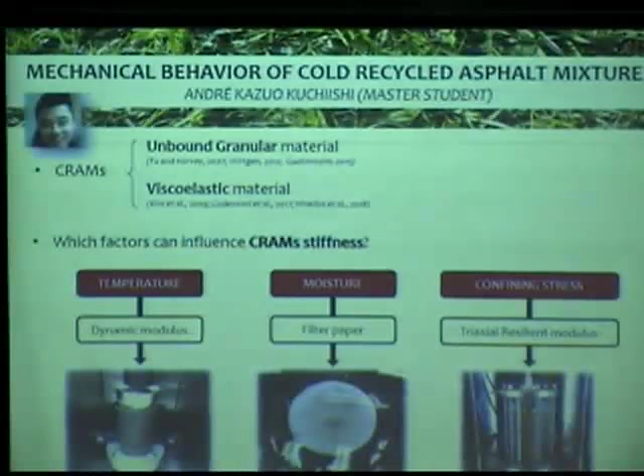some performance model for this type of material, cold recycling with foamed asphalt. The second study, from Kazuo, our master student, he should be done by the end of this year. In his study, he will try to understand better the stiffness behavior of cold recycled mixtures, not only the ones with low binder, but also the ones that have a little more hydrated lime or cement on it, since we have a couple of test sections using more cement.

In his study, he will try to get the influence of temperature on this material, the influence of moisture, more specifically, what exactly is going on during the curing process, when water is getting out of the material in the lab and in the field, what exactly happens. And also the confining stress.

The third study is conducted by Vanderlei. He's right behind here, he'll also be working on cold recycling. I've put here the 4 test sections already constructed and under evaluation. What we see here is these 2, one with emulsion, the other with foamed asphalt. But this one has 2% cement, a little more binder than what is established by South Africa. And it has 12 centimeters of HMA on top.

The other 2 structures are on the same highway, but now I have just foamed asphalt, on one side RAP, and the other virgin aggregates. But on top, I have just 5 centimeters. So this type of section is more similar to what is being done in South Africa.

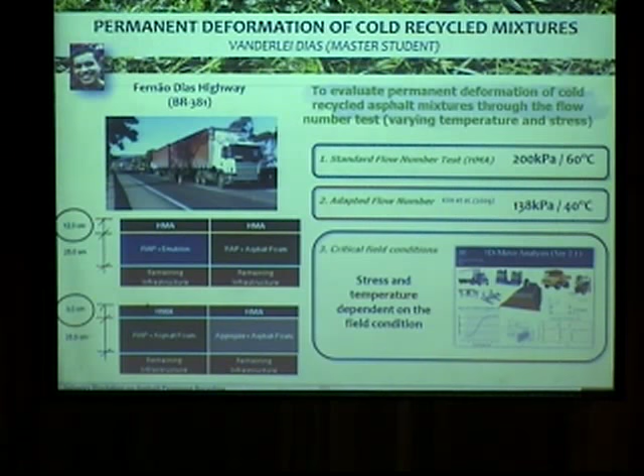So the idea is, if we assume that permanent deformation is the main distress on these structures, how we may evaluate it, and we selected the flow number test. There's a test for HMA, so that's the first standard here, using stress of 200 kPa and temperature of 60 degrees C. But we are also going to test different conditions, in terms of temperature and stress. The second scenario follows the recommendation of another publication with less stress and less temperature.

And the third condition is to simulate in a 3D software what is going on in these structures and try to get that on the test.

Going to hot and warm recycling, this slide is from a former student, he's not in the lab anymore. Manuela did her PhD and also postdoc at the Laboratorio of Pavement Technology under the supervision of Professor Liege Bernucci. Manuela's study was very broad because she worked on the binder, on the mix, and during her postdoc, she got also the field test sections with 8 different mixtures.

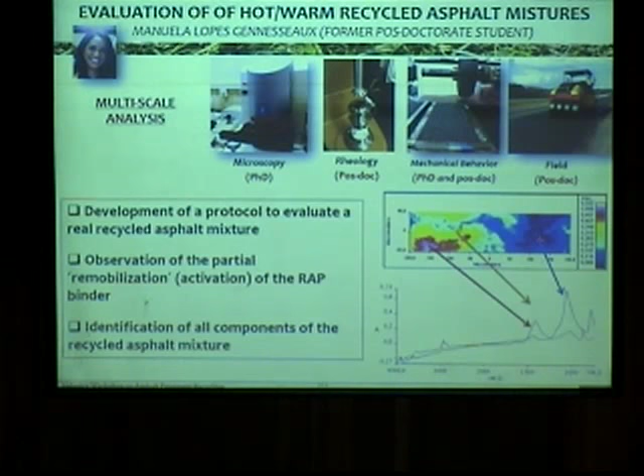Another study that just started this year has been done by Zila Mascarenhas, also a PhD student, on multi-recycling. It's not an actual issue in Brazil yet because we are still trying to keep going on the first recycling. But if we recycle today, in 10, 15 years, we might want to recycle this mixture again. May we really get back the performance of this recycled mixture 1, 2, 3 times, or how many times can we do that?

So this is part of Zila's study. She'll keep her eyes on the binder, but also on the mixtures. I don't think we'll be able to do anything in the field related to multi-recycling yet.

Another study has been done by Karina, a master's student. She has mostly lab results, trying to increase the amount of RAP in the mix, with and without recycling agent. Karina also works at a concessionaire here in São Paulo, so she's trying to put this mixture in the field. She's done a detailed literature review on what should change in our asphalt plants to really recycle these asphalt mixtures. In Brazil we're trying to stay cautious at this first moment, but it would be nice if we could have asphalt plants prepared for higher amounts of RAP.

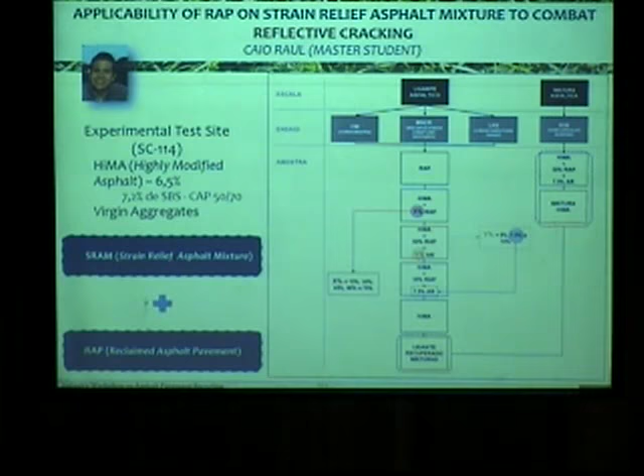This study is also being done in our lab by Márcia, a master's student. This one is not only related to recycling, but to aging. On the binder side, we try to understand this aging process in terms of physical, chemical, and rheological measurements, using different binder sources chemically speaking, but also different rejuvenators.

I guess this is the last one. This has been done by Mateus, also a master's student. I mentioned the degree of blending in a previous slide - Mateus is trying to quantify this blending. We're going to mix the binders anyway in the lab or in the plant, so how can we quantify if this binder is really homogeneous or not? In his study we are doing staged extractions, following a standard ASTM procedure, and using rheological and chemical parameters to get at this DOB, degree of blending.

Regarding hot and warm recycling, we definitely need better asphalt plants, otherwise we will always be limited in the amount of RAP we can put in our mix. We have to take more care with RAP handling, because if we decide to use it as part of the hot mix asphalt, we have to know what we are putting in there. We also need to improve mix design and understand the use of rejuvenators in the plant.

But maybe the most important final message: we are pretty sure we can do more, we can do better, if we keep working together. RILEM is a very nice opportunity for that. I keep saying to my friends and colleagues that after I entered RILEM, everything changed, because I know many more people now, I know what they are doing, we keep in contact, we discuss different points of view, and I think that's very productive. So I think that's it.

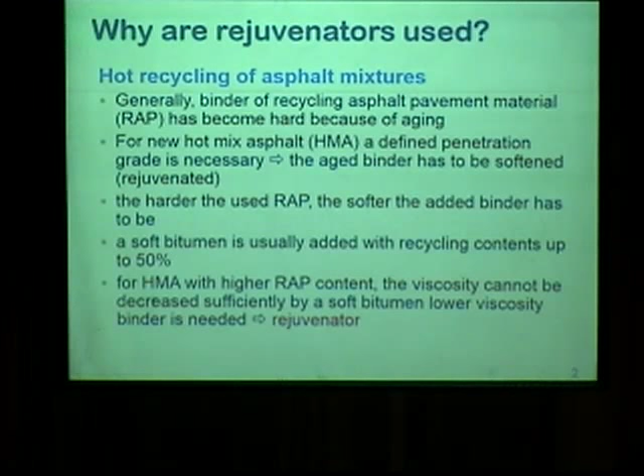Why are we using rejuvenators in hot recycling? This is especially for hot recycling. The recycled asphalt pavement, the old material, gets hard. So if you want to use it in a new hot mix, you have to make it softer to rejuvenate this material. There are several options. Normally you just add a softer binder, and if you mix it with the old material, you get the binder rheology you normally want in a hot mix. But that only works up to about 50% RAP content. If you go higher, you need an even softer binder, and eventually there is an end - you don't have binders soft enough. So you have to add a rejuvenator to decrease the viscosity of the mix.

So what are these rejuvenators? This is not an easy question because the chemistry is very different, as the sources used to make them are quite different. You can make rejuvenators from mineral oil like bitumen, or use plant products like vegetable oils, which may be too expensive, or other industrial byproducts. The sellers of these rejuvenators are very ingenious - they can sell a lot of things, and you have to be careful what to buy. Actually, it's not only the viscosity which is important. You cannot just decrease the viscosity of the binder; you have to look at other things.

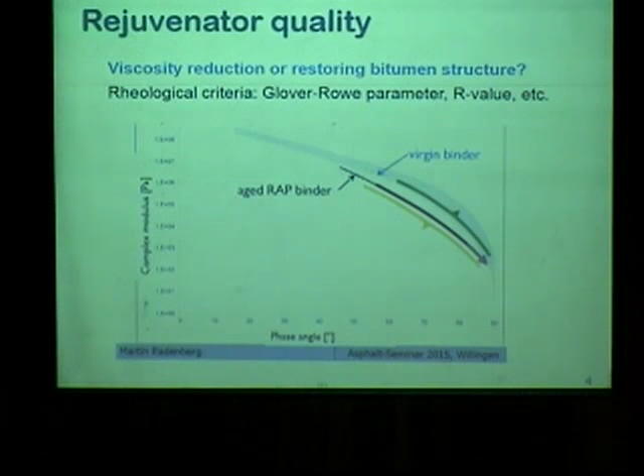But how can we find out what is a good rejuvenator versus a not-so-good one? There is an interesting study from Germany comparing quite a lot of different rejuvenators on the market. These are results from DSR measurements: the black line is the RAP, the old material, and the blue region is what you normally have for a virgin binder. What you want is that adding the rejuvenator brings the mixture back to that blue region. Some rejuvenators can do that, but a lot of them just move along the same line, which is more or less just reducing viscosity. Some even go in the opposite direction, which you don't want. So there are other criteria, and we are still struggling with what is the right method to assess the quality of rejuvenators.

We also have to look a little bit at the aging of the bitumen to understand why we can use these rejuvenators. Actually, you can divide a bitumen into different parts, normally called the SARA fractionation, which divides the bitumen into 4 different regions: saturates, aromatics, resins, and asphaltenes.

And if you look at the aging, for example in RTFOT short-term aging, you see that the saturates and the aromatics are decreasing in amount, and what is increasing are the resins and the asphaltenes.

So actually what you could think quite easily is that you only have to replace the saturates and the aromatics, and then you have again your new bitumen. But this is not so easy, because you need quite a lot of these saturates and aromatics, and normally you don't add such a large quantity of rejuvenator. It's about between 5 and 10%, depending on the amount of RAP. So that's not actually possible.

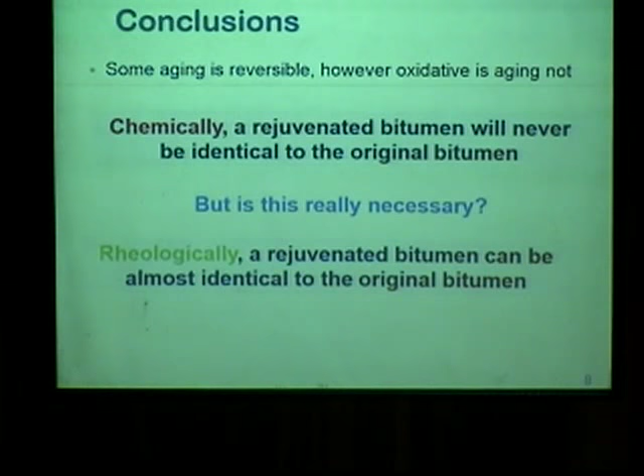But probably rheologically, rejuvenated bitumen can be almost identical, at least in the beginning. But one important point is the aging, and this is actually exactly what we are doing in our TG3. We are looking at the aging behavior of such mixtures between rejuvenators and bitumens.

We have not yet any results, so you have to wait a little bit. So I give over to Dr. Falchetto.

Okay, good morning. I will start from where Martin left off. I will show you some results of a study that was performed at TU Braunschweig in Germany. It's a very simple experimental study on the possibility of using rejuvenator in combination with reclaimed asphalt pavement.

And as I said, the experimental study is based on a simple and, let's say, new test that was proposed in Germany, which is the bitumen Typisierung Schnellverfahren, or in English, binder fast characterization test, and on a series of conventional tests on asphalt mixtures. Okay, what did I do wrong?

This test, the BTSV, was proposed basically a couple of years ago to replace the conventional binder characterization used in Germany based on penetration and ring and ball, so softening point. This is basically the first version of the test, the first cover page, which can be translated as: introduction for determining the deformation behavior of bitumen and bituminous binder with the dynamic shear rheometer, BTSV procedure, binder fast characterization test.

This test is based on the dynamic shear rheometer, and in this case is used to determine the amount of rejuvenator to target a specific rheological property of the blend of new binder, aged binder, and rejuvenator. It's performed with an increasing temperature at a rate of 1.2 Celsius per minute, 500 Pascal, and a single testing frequency. From this test, what we obtain is a temperature, T-BTSV, and a complex modulus and phase angle at a specific complex modulus value of 15 kilopascal.

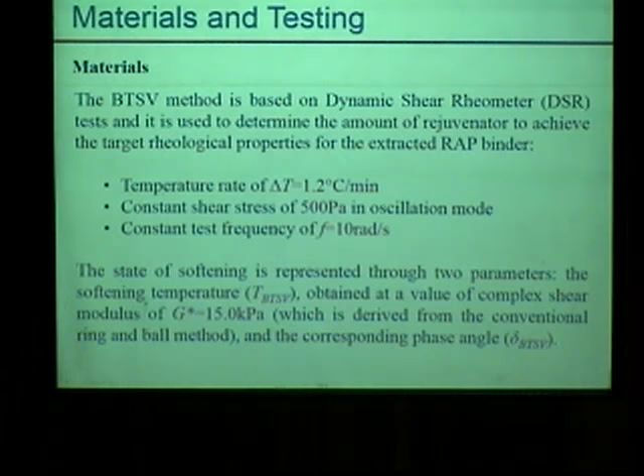At first we have a plane which gives us the temperature and the G star, from which we obtain the corresponding temperature based on the G star limit of 15 kilopascal, and the corresponding phase angle. Based on that we get what we call the BTSV plane, obtained by plotting the temperature of BTSV versus the phase angle.

What we found is that when we blend binders, we move along a line that is targeting the final binder box, which may be different depending on the binder that we are using. But when we use rejuvenator, we are moving along a horizontal line.

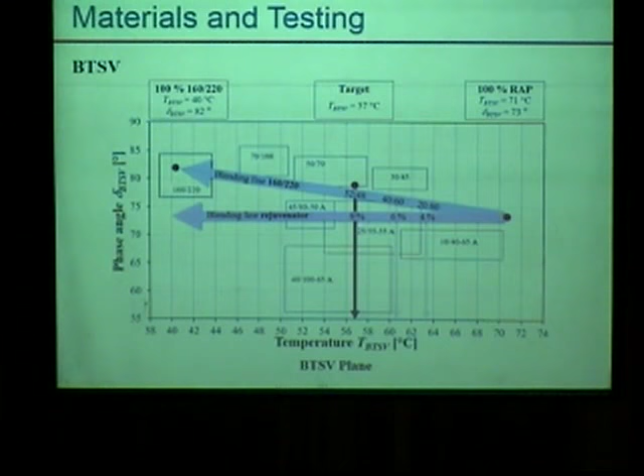What we did in this study was to select a specific RAP binder and a specific RAP source, and we blended it with 3 different rejuvenators, basically one soft binder and 2 types of rejuvenators at different percentages, 20 and 40%. We targeted a final blend value of 57 Celsius for the softening point, and for the bitumen type, the Schnell-Verfahren temperature, or BTSV.

After we determined the amount of rejuvenator, we ran simple conventional tests on the asphalt mixture to determine resistance to permanent deformation, finding that the method actually decreased the rate of permanent deformation, except for one specific rejuvenator.

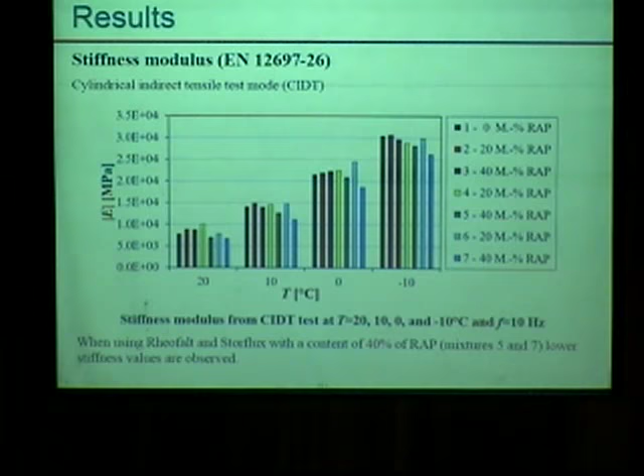In the case of the rejuvenator compared to soft binder, we had a decrease in the stiffness modulus, which can also be seen in the trend of the master curves, with a softening at lower temperature and a moderate stiffening at higher temperature. This is for 40% of RAP, while the previous one was 20%.

Then we looked at fatigue, and we determined that the contribution of the rejuvenator to the mixture prepared with 20% RAP was not so significant, although there was an improvement in fatigue life, while this was much more significant at 40% RAP.

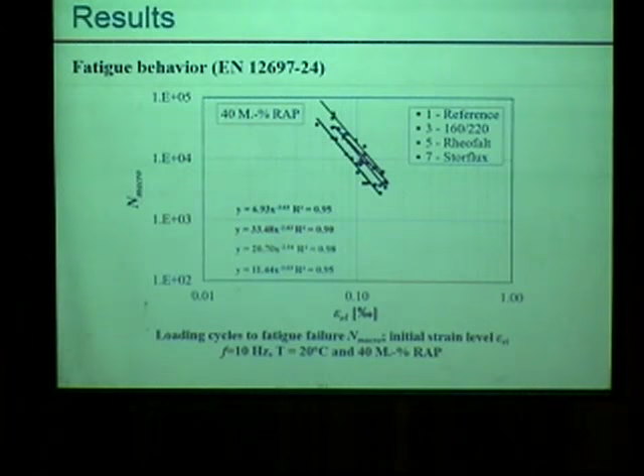And what I care about most is to show what happened at low temperatures, which is much more interesting and very questionable. We ran the TSRST test, the thermal stress restrained specimen test.

And what we found out is that there is not consistency in the result, because what happens is that we have an increase in the failure temperature of the mixture, although the failure stress, or strength, remains basically the same.

This poses some question on the method that we were proposing, the bitumen typisierung Schnellverfahren, or BTSV, on its ability to really provide the correct amount of rejuvenator needed to rejuvenate the binder and the RAP binder in the mixture.

Summarizing, what we have done was to try and evaluate the possibility of using this new BTSV characterization method to design mixtures containing reclaimed asphalt pavement and rejuvenators. For stiffness and fatigue, we have a reasonable result. At low temperature, as I said, the results are relatively similar in terms of strength, but in terms of failure temperature, we actually have poorer performance.

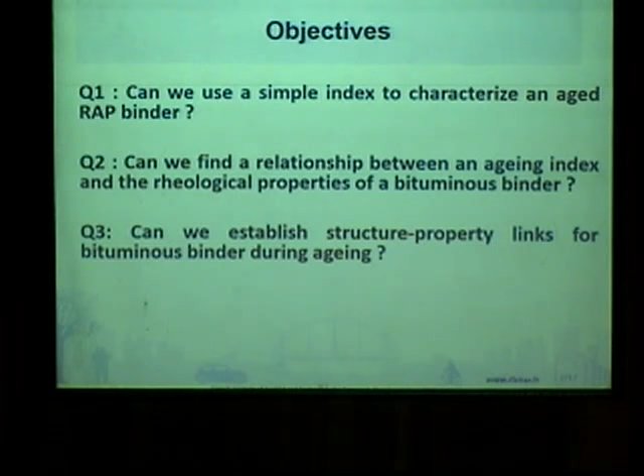To answer this question, we took the opportunity of a former RILEM TG, which built a database with binder properties of the mix at different aging steps. They started with two types of mix, one lab and one plant, and applied an aging procedure to this mix, in order to have a ranking of increasing RAP aging.

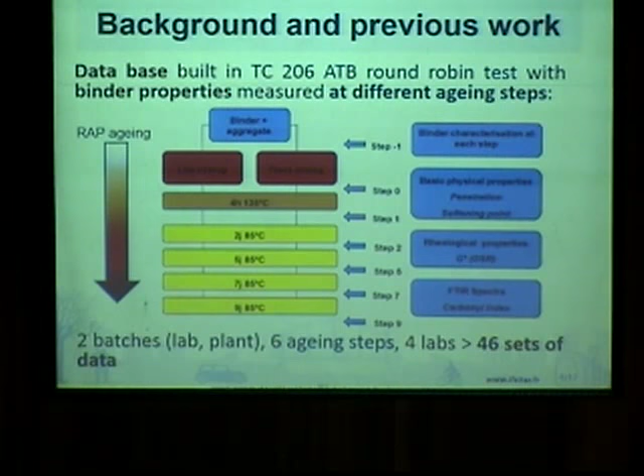So we'll go in detail for the FTIR spectra. The basic principle is that during aging, some oxidative groups, some functional groups are formed, mainly carbonyl bonds and sulfoxide bonds. So they can be identified in the infrared spectrum.

So you can see here this example of the carbonyl. You have some more absorption in this region, for this wave number.

So the problem is that in each lab, the method for calculation of an index from this spectrum is very diverse. So here I put an example of the area method. In fact, the principle is to define the area of the carbonyl peak and to compare it to a reference area supposed not to be affected by aging. So if you make the ratio of this area to that area, you have an index of aging.

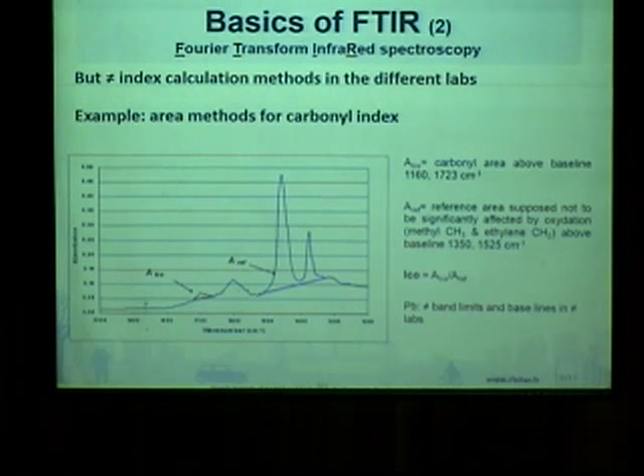So all the labs use the same principle, but in fact all of them have some different way of calculation. Maybe they change the bounds, they change the reference, the baseline. So in fact the results obtained are very different.

We start from the same spectrum database, and if different labs use their own method for calculating an index on this same database, you obtain very different results. So obviously we can put a number on aging, but harmonization is needed to have the same aging index.

But you can see that the trends are the same. So if you use the same method, the method of the lab, you have the same trends according to the aging.

So the second question is, can we make a relation between this index and the mechanical property of the binder?

So as I showed you, we have a database of G-star values. It means a lot of data points. You have G-star measured at low temperature and high frequency, and measured at high temperature and low frequency.

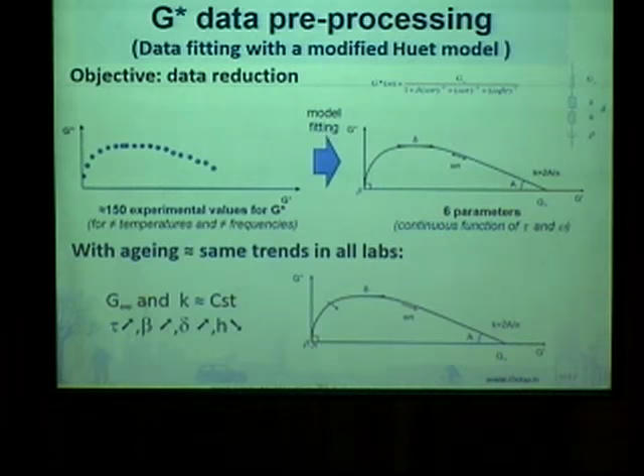So it means with aging, more or less we can say only 4 parameters are moving. So we tried to correlate, since we have trends with the aging index and trends with these 4 parameters, to see if there are empirical correlations between the two.

So that's what we've got, but there's of course a lot of limitations. We only have this correlation as empirical. It's not based on a scientific explanation.

It was made only on one bitumen and on fresh bitumen. As Martin said before, the oxidation would be different if the binder is regenerated. And one of the limitations also, we have seen there are many aging calculation methods, so we need harmonization.

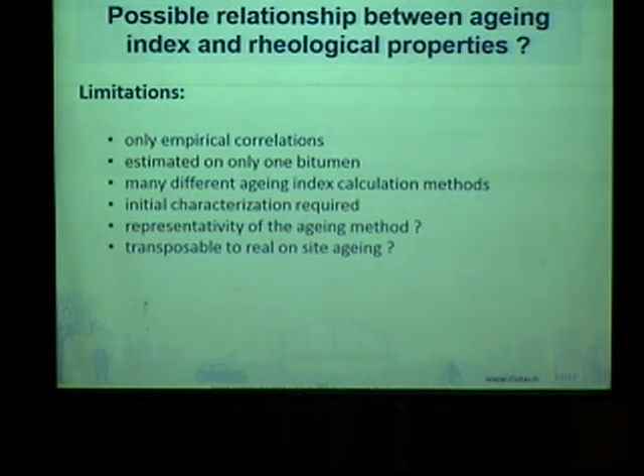So the third question was: is it possible to have a relationship between the property of the binder and the bitumen structure? It's based on an assumption called the delta method, where the assumption is that the phase angle of G star reflects relaxation of the molecular structure according to their mass.

So basically, if you take a phase angle curve, the basic idea is: when the angle is 0, you have an elastic behavior, so no structure is assumed to be relaxed. And when the angle is 90 degrees, you assume you have a viscous behavior, so all structures are relaxed.

As you lower the frequency, the molecules relax according to ascending mass. So more or less, you can see the phase angle like a grading curve of the molecules of the binder. This means there's a change in axis - the x-axis goes from phase 0 to 90 degrees to a cumulative distribution from 0 to 100, and it changes from a frequency axis to an apparent molecular weight axis.

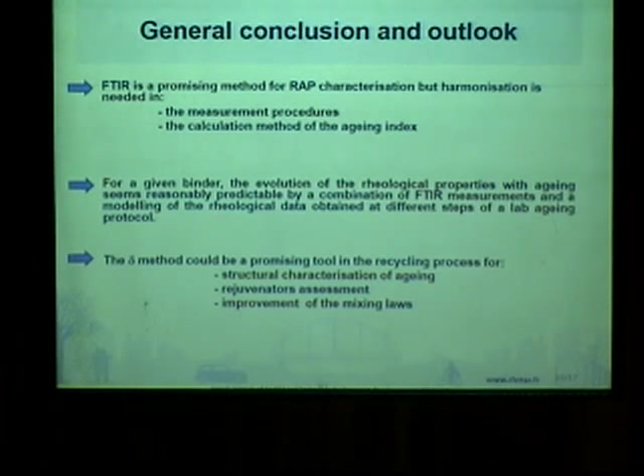So these are some exploratory tracks, and now the idea is to see how they can be used in real life and if they can be of help in recycling at the industrial level. Thanks for your attention.

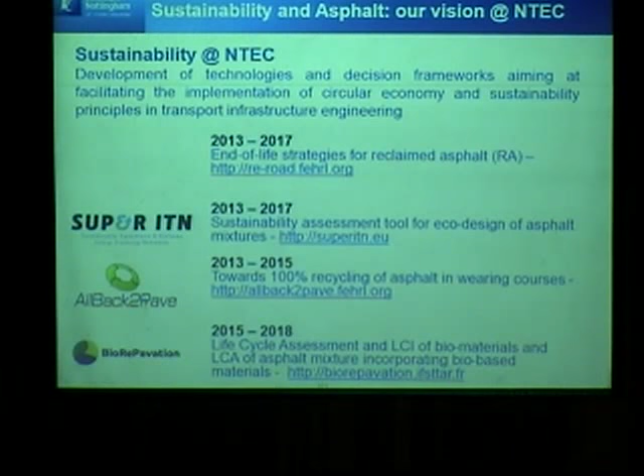Recently, we also tried to understand how to incorporate biobinders with some friends that are also here in the audience - Lauren is one of those. But how do we do that? Well, what we know to do is research with our materials, trying to understand how to make design, testing, and also field experience. But our main research question in these years was, is actually maximizing recycling something that we can call sustainable?

How can we assess it? How can we assess whether we are actually also minimizing the impact? The other stream of research that we undertook was trying to understand how to do sustainability assessment and trying to actually understand that we're actually minimizing the impact.

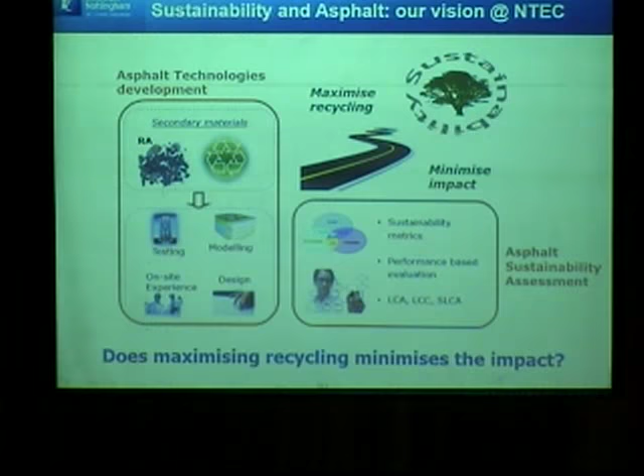So today, I'm going to show you some results of one of the projects related to maximizing recycling in wearing courses. This was an effort that finished a couple of years ago, 2-3 years ago, and was financed by the Conference of European Road Directors, as the aim was really to understand, absolutely blue sky thinking, how we can arrive to 100% recycling. What we need to do, what are the challenges, what are the mistakes that we should avoid.

This project was led by a university in Germany, and I thank all the people that worked on this project. There were universities involved as well as industry and associations that helped get data as well as expertise to actually undertake the project. So the project was divided into different stages, but we look at understanding how to increase recycled content by looking at mix design, also the blend design that we will see later, but then also playing with the asphalt plants, and at the end understand the performance and the sustainability of the technology we developed.

So, going very quickly - and again, this is the other presentation, but it's okay - what we did was trying to understand, first of all, how to characterize the RAP. Because RAP is such a complex material that we can't just use the methodology we know. We need to understand how to characterize this material. And this is exactly what the TC RAP is trying to do.

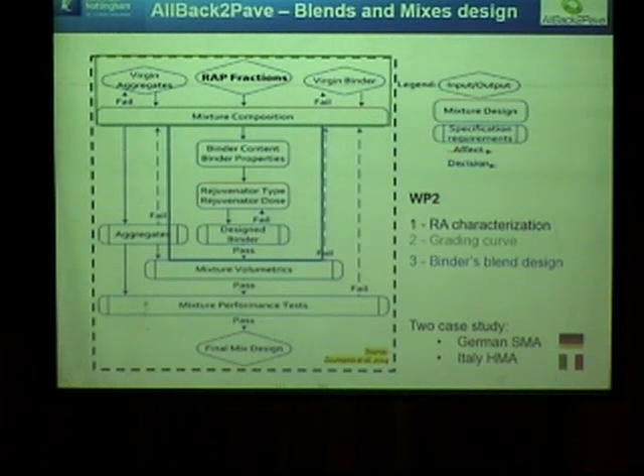We did this for 2 case studies. One was an SMA from Germany, and one was an asphalt concrete from Italy. And we tried to understand how to arrive to 100% of recycling. So how can we actually assess what's the maximum amount?

Well, we consider 2 paths. First of all, we look at the aggregate and try to understand whether there is some limitation. So usually, when you do...

A mixed design, but am I changing this, or is it you? Ah, it's you, okay, good to know. It's me? Okay, thanks. You say yes, no?

Right, so usually, currently, when we do a mixed design, consider a grading curve of RAP, we consider the white curve. So we get rid of the binder and we consider the stones that are the product of the extraction of the binder, right?

So in the case of the German mix, with that white curve, we could arrive at a maximum of 70% to stay within the bands. So we said, okay, let's go on with this one and try to make some mixes with the 70%. But with the Italian one, we said, why not try something a little bit more challenging?

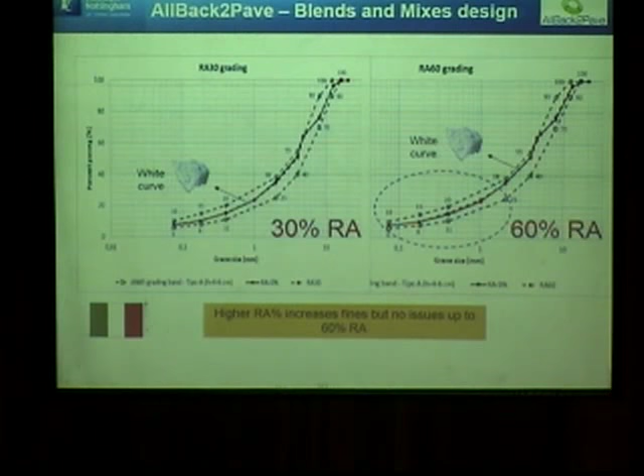So we used the 30, the 60, and everything was fine. But then we went over and there were some problems. So we thought, well, but maybe, as in life, nothing is very much just white and black, right? Maybe there is something in the middle.

So if the white curve is the curve of aggregates without binder, and the black curve is the one with binder, we said, what about if we consider something in the middle, something gray? So we considered including in the mix design the partial blending concept. We didn't really know how to assess it, but at least we tried to consider it in the mix design procedure.

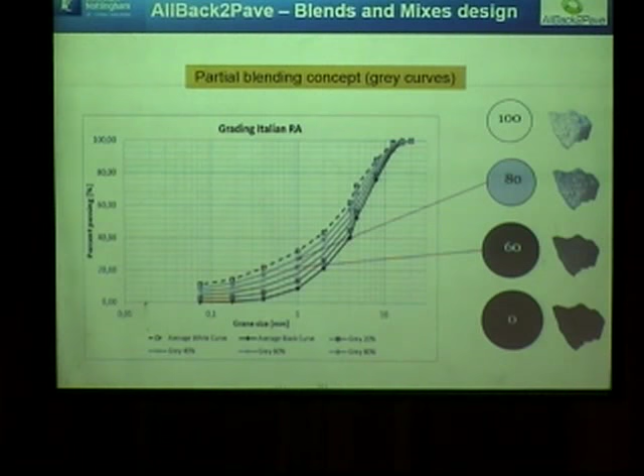And with this, we even arrived at producing 90% RAP, which I don't present today, but there are deliverables, and I can guarantee you that they kind of worked.

Now, you need a plant to do that, as you were saying, and we went to Germany for this, because we didn't find one in Italy. So this was one of the limitations. The grading curve and the current way of doing mix design can possibly be improved.

The other way was trying to understand what happens with the bitumen path. Now bear with me just a second. This is a concept that we tried to include to improve what we call blending charts.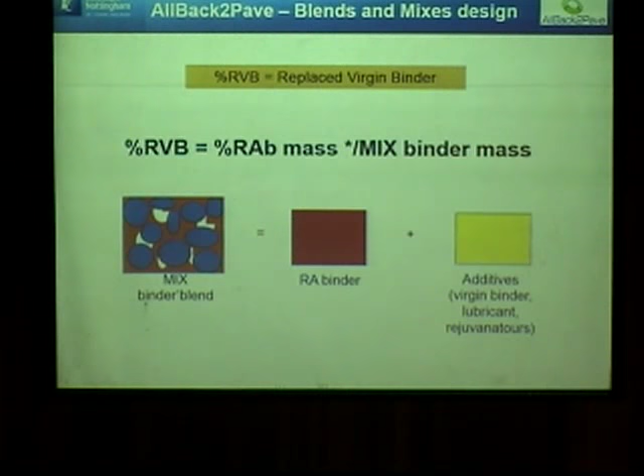So if the orange one is the binder of this new mix with older RAP, you would agree with me that the main part of this binder will be the binder from the RAP itself. That is the red one.

Then, if we put some recycling agents, they can be additives, lubricants, warm mix additives, depending on what you want from the new binder. We can consider the replaced virgin binder as the contribution of this old binder from the RAP to this new binder in the new mix.

So if we consider this concept, of course it will vary based on the binder content of the RAP, as well as the concept of partial blending. So what is the amount of activation of this binder from the RAP?

So what we did was go into the mix design by having some input that not only varied the amount of RAP, but actually made an attempt to vary the activation, just making a hypothesis. Then, based on the activation, you actually get a different percentage of replaced virgin binder.

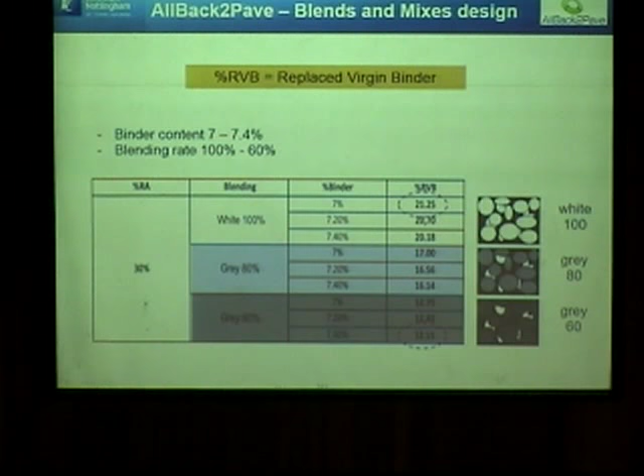This allowed us to build some new blending charts. They usually have RAP on the x-axis, but in this case you have replaced virgin binder. Thanks to this, we could see what happened when you changed the amount of activation as well as the amount of RAP, by considering the replaced virgin binder quantity.

I'm not staying too long on this because I know it's quite technical, but happy to answer any questions. What this allowed us to do was to actually check, doing some quality control on the binder that we selected as the new virgin binder, or the type of rejuvenator, or the dosage, because thanks to the blending chart, we could see which properties we wanted to obtain.

So another limitation, in this case just for the binder, was the target you want to achieve. But by considering the replaced virgin binder, you can also consider the partial blending concept in the blend design. Again, I hope I was clear, but for more details, there are some publications we had on this topic.

Right, so we then went on to the plant. We actually made this, but there are some deliverables that you can find. I didn't publish a lot of these things. I need to publish, actually, but I have no time. And then we went on to the performance assessment.

As a takeaway message for this part, if you want to maximize recycling in wearing courses, it is fundamental that we find a way to better characterize this RAP. Because the wearing course is the functional course where we have to guarantee not only performance but also skid resistance, the mix design using hot mix or warm mix methodology needs some innovation.

The grading curve of the RAP is a limitation, but the partial blending concept can actually help. On the other hand, working preliminarily on the binder blend, making a quality control of the different rejuvenator or additive dosage, and comparing them with the target for our final blend, I think this needs to be included in any work that goes forward in this direction.

So this is the first part, the technical part, right? How do we maximize recycling in the wearing course? And that's a little bit of the contribution that we try to make.

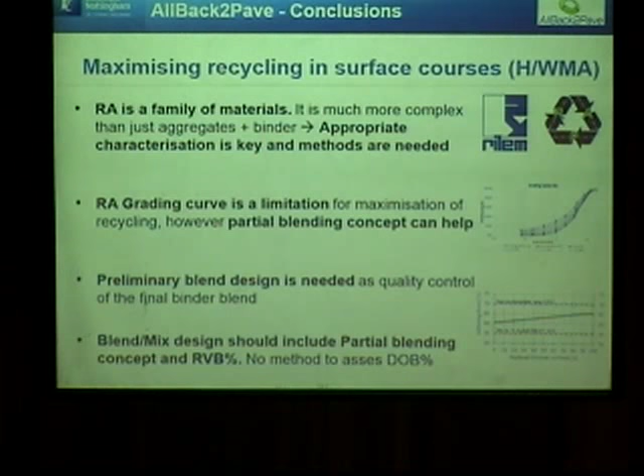But one other thing that is needed is understanding how we can actually assess the degree of activation. This is an effort we are doing within the TC RAP with Camilla, and we just started really. So I think in the next 2-3 years we will hopefully also provide this type of contribution.

For any information, we have a page on ResearchGate. Oh, you know Camilla is here.

Now, how do we actually minimize the impact? So our effort was not only directed to understand technically how to do it, but we wanted to understand how we can consider this choice sustainable.

So what we did, I'll try to go quickly here, is we contacted different road authorities and tried to make a comparison that could be representative for Europe. We got different data, built some case studies, and did an impact assessment. It was both environmental and economical, but today I'm just going to talk about the environmental one.

So the idea was to consider an operation where there is an inlay. Basically you take away the layer, the wearing course, and then you put a new one. That is an operation we do constantly. And we're going from the product stage up to the end of life, not considering the use part, because it was a comparative analysis and it's quite complex, to be honest.

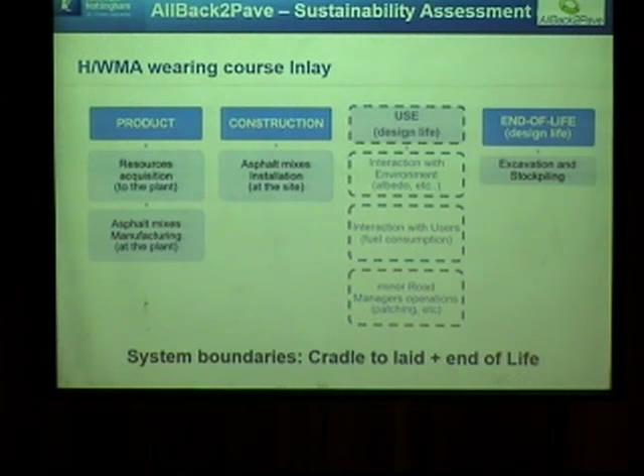So the idea was to make a carbon footprint. I don't know if any of you have done this type of exercise before, but basically we want to account for at least one environmental parameter. In this case, it was CO2. We used some free tools, got all the information from the asphalt plant, knew the mix design recipes, and considered some realistic maintenance scenarios of this wearing course in 3 different countries.

Now, as a main hypothesis, we considered that the durability of the current procedure, the current mixes - the one without RAP - was actually the same as the one with RAP. This is a massive assumption, but it will at least allow us to go on and get some information. Durability is something we need to assess better.

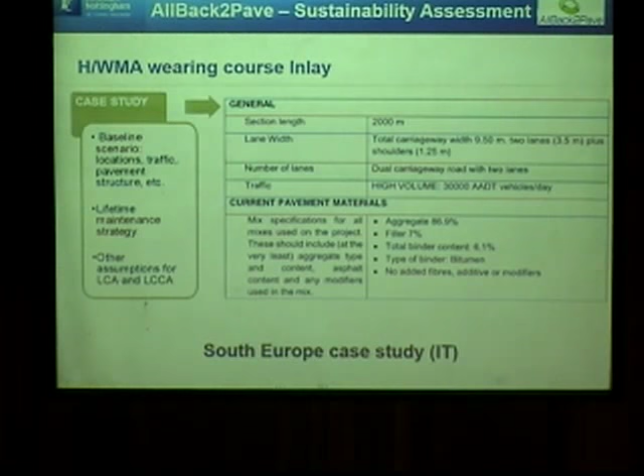Going very quickly, we built some case studies, getting a site where there was actually this inlay procedure, as well as transport distances from the asphalt plant - this is where I come from, by the way, I come from Sicily. We got more information on the site, as well as details about the procedure to make this maintenance operation. One important thing is to assess the different transport distances, which we'll see are key in this type of assessment.

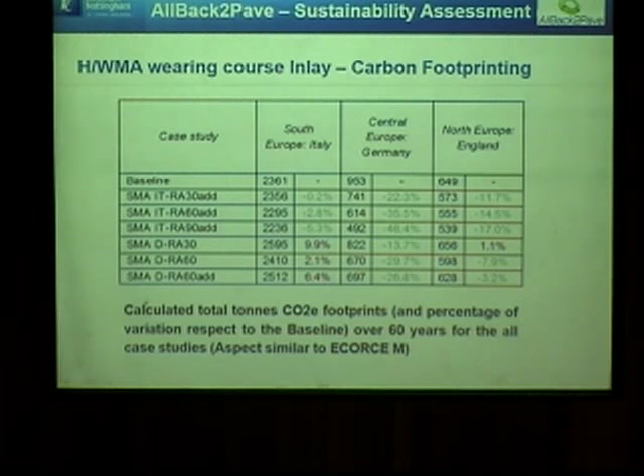So at the end, very briefly, in terms of carbon footprinting, we looked at making an inlay operation of a wearing course with hot and warm technology with different amounts of RAP, and found in terms of CO2 that it is very subjective, as you can see. But generally you can say that increasing the amount of RAP could lower the CO2 or give similar results. But responding in absolute terms is very difficult - it's case by case. Just to give a little more insight on this.

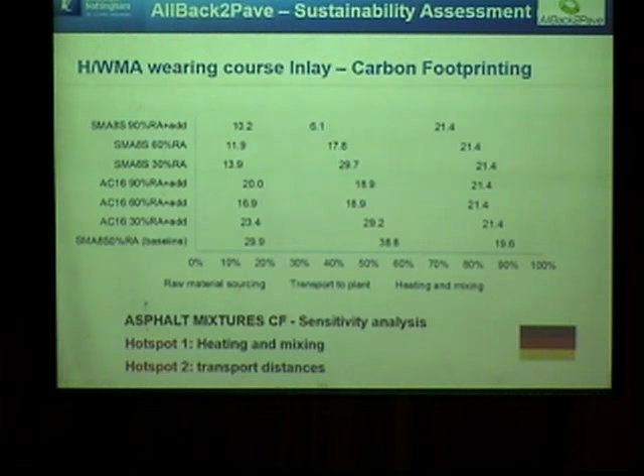When we moved to the German case, we saw that the asphalt plant had a big role, but the transport had a much more marginal role. While when we went to understand just in the asphalt plant what happened, we saw that in that case, the transport distances had actually a bigger role, as well as the emission coming from heating and mixing.

So, results are in this deliverable, but what I want possibly to give as a takeaway message is that if we consider durability the same as we did here, then you can say that increasing the amount of RAP actually provides similar or lower carbon emission. But if the durability, for instance, is lower, it's a completely different story.

So we have to be careful when we try to maximize recycling and say there is an environmentally friendly option. Another takeaway message is that it's very much case by case. You need to do what we call hotspot analysis.

And for instance, we found out that if we have transport distances for building the road or maintaining the road that go over 100 kilometers, in all the case studies, recycling almost didn't matter. So the impact of transport in terms of CO2 was bigger than any possible way of recycling.

Just to wrap up, I think that from this study and what we are trying to do, the main message that can go across to you is that in order to make sustainable pavement, to really introduce sustainability, we have to continue what we're doing on pavement design, working on materials, but alongside we need to have a sustainability assessment exercise that is representative for each country, where we can actually have a loop and understand that what we are doing is actually sustainable.

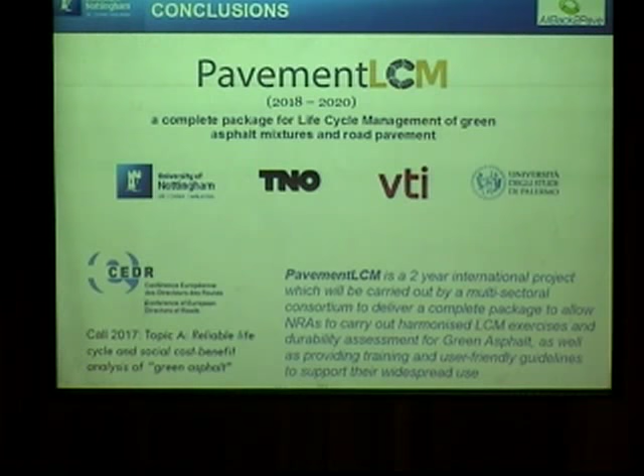Having said that, I just want to say that we are continuing in this direction. We have just been awarded a project for the next two years for the Conference of European Road Directors that will build some guidelines to be used in Europe for sustainability assessment, but that can be spread elsewhere too, maybe in Brazil.

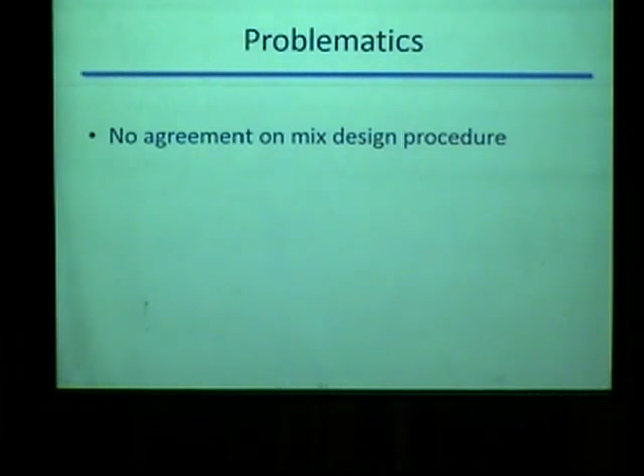No agreement on the cure. It's a specimen that has an evolutive behavior like I mentioned, and if we don't agree what the cure should be, we get different results. No agreement on how to make lab specimens to represent the field. No agreement on which mechanical properties we should look for, and from which test.

Whoa, won't be long. Maybe not - there you go.

Stay there, good. Okay, for example, I'll just show you for the cure. I can show you those kind of tables for many other things, but for the cure - those are all different. Every line is a different cure, but all supposed to represent basically the same thing.

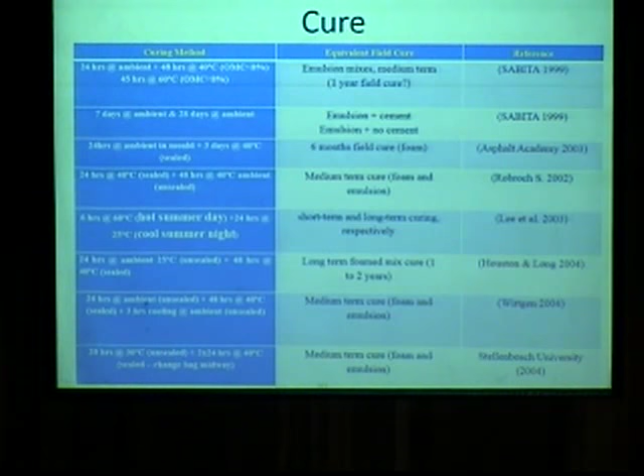And you'll have lab results that show it does work - in a specific case, that much time at that much temperature, that much relative humidity, ended up giving the same result as a year in the field. Then you change the field place - instead of having it nice and hot and warm like in Sao Paulo, but we didn't see that in the last two days, let's say in some Montreal weather, very cold and windy and everything, it's not the same field performance. So in the lab, we should not do the exact same thing.

So in order to look at that, there was a TC group that we're all part of, the TC RAP. And the TC RAP is separated into different TG.

Maybe one more - there you go. So...

I'm co-chairing basically the TG1 on cold recycling. The others are not that important right now, because we're talking only on cold recycling. Really having a hard time with this - so the objective behind TG1...

Okay, maybe, almost. Can you go back up one?

First, evaluate the ability of a fragmentation test to actually characterize the RAP itself. Right now we don't have any way to say if the recycled asphalt pavement we put in it is good or bad, or if it will work, except doing a full gradation and extraction of the bitumen and everything, which isn't necessarily useful.

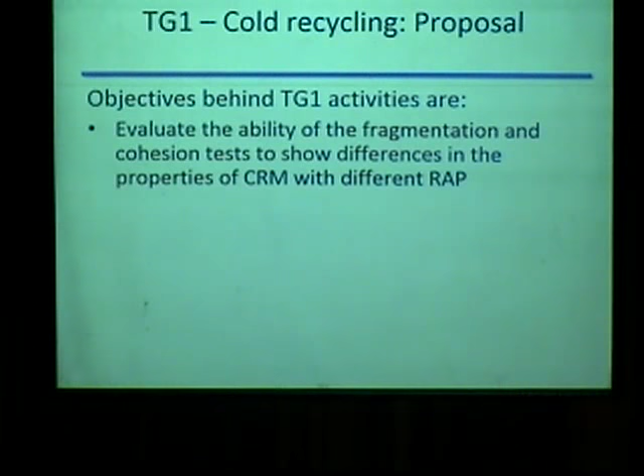Next, to quantify the impact of the compaction type. There are many different methods and equipment to compact the material, so we need to verify that.

Evaluate the effect of the type of binder. As I said, the bitumen can be put as foam or as emulsion. In many places, Quebec for example, and other provinces in Canada, it's considered equivalent, so you put whichever is cheapest. In our case, often foam wins because it becomes cheaper than emulsion.

And to implement a volumetric approach to cold recycling, a bit like the same approach used in hot mix.

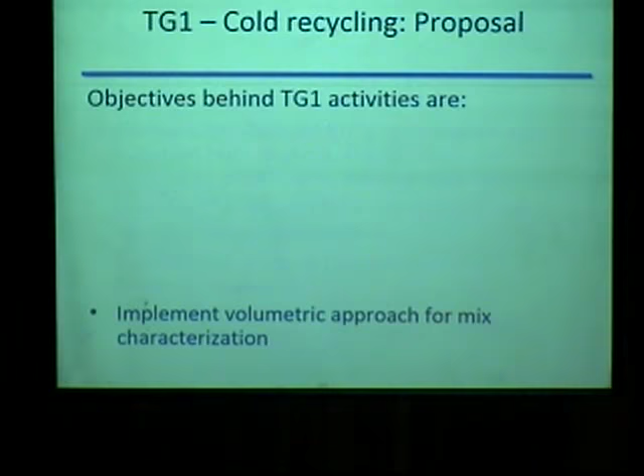The fragmentation test, if you've done fragmentation on aggregate, is basically the same thing. We take the RAP, try to crush it, and look at fines before and after. The rationale behind that is part of TG 6 of TC SIB from a previous RILEM committee.

It was the fact that when you compact cold recycled material, does the gradation of the RAP itself change during compaction, during laydown? If it does change, the properties measured in the lab are not the ones you're going to find in the field.

So this test is supposed to say: if it breaks apart, we'll call it bad RAP; if it doesn't break apart, it will be good RAP. That's a test to characterize this.

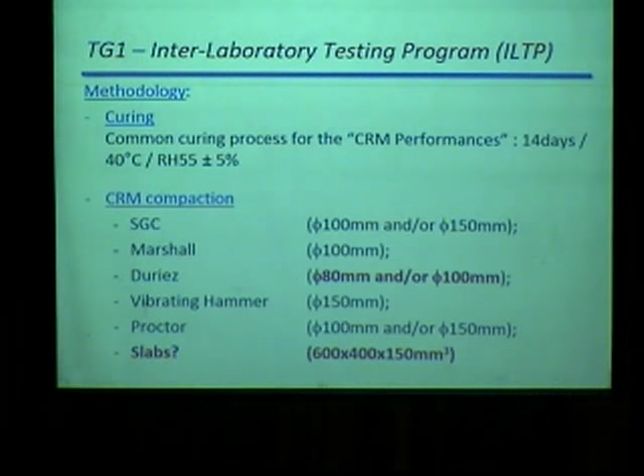The goal is to get the same air voids level. We're aware that if we point for, let's say, 9.8% air voids, nobody will be at 9.8 precisely, that's not possible, but we should be around that.

Once we compacted the material, we do a bunch of tests. Which tests you do depends what you have in your lab, so we go from indirect tension to wave propagation to complex modulus to everything. The goal is to try to see the influence of different RAP and different compaction.

And this will be done with the exact same program, done with foam on one part and done with emulsion on the other part, so we compare also the type of binder that we have in it.

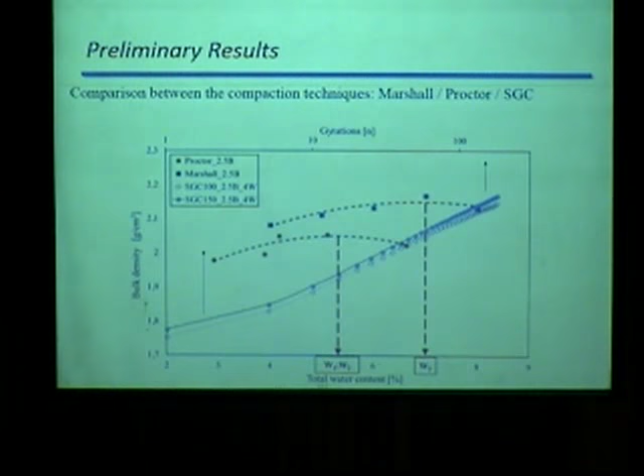Last result I can show you - this is with foam. With foam we use a third set of RAP just to be sure we're not using the precious RAP needed for the exchange program. So it's compacted with Marshall, with a 100 millimeter mold, and then we have gyratory 100 and 150.

They were compacted to around 9% air void, so it ended up at 10% for 150. Something I did ask for the result - for the gyration, to get that level, for that RAP we're at about 15 gyrations. So basically we just put it in, plop, we stop. And it did work.

And then we look at ITS. So a few things we can see. First, those are statistically different - so the impact of the compaction method is important. That's one thing.

Second, if we look at the gyratory compactor, the size effect is also important. So for example, if your minimum value that you need to reach for a contract perspective is 500, and if you have a 6-inch or 150 millimeter mold, it doesn't work. It's the same material, you did the same mix design, it will behave the same way in the field, but in the lab it works, doesn't work. So that's an important point - that's why we do all this.

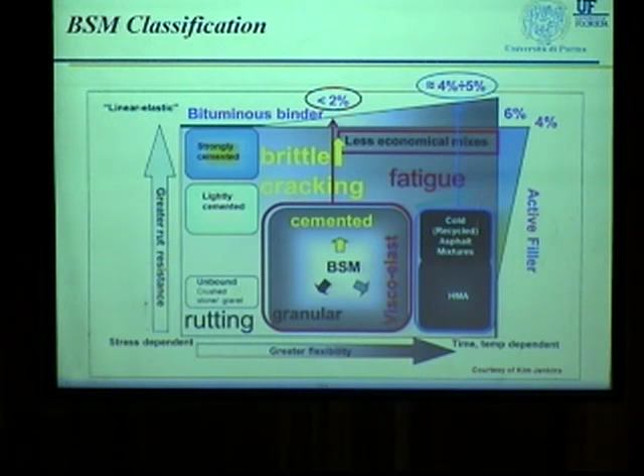First, let's define clearly what we have. The material we are talking about is bitumen stabilizing material, so something in the middle between an unbounded material and a fully bounded material. We have an amount of bitumen that is almost half of the bitumen in a fully bounded asphalt mixture. That can be hot or cold, but the difference is the amount.

So what's happening in the material? We need another important component, the active filler. If we check the Sabita guideline for bitumen stabilized material, the maximum amount of cement is 1%. Why? We don't need the cement to bind the material, but we need the cement, as with all active fillers, to carry the bitumen.

So what we are looking for is the air voids. We use cement or hydrated lime, which is even better, because they have a higher amount of void compared with traditional filler.

And if we look at the surface of the fine part, the filler, in comparison with the coarse part of the material, we can clearly see the surface in the filler component is much bigger than the surface on the coarse side - almost 200 times bigger in terms of square meters per kilogram of material. So why do we need this?

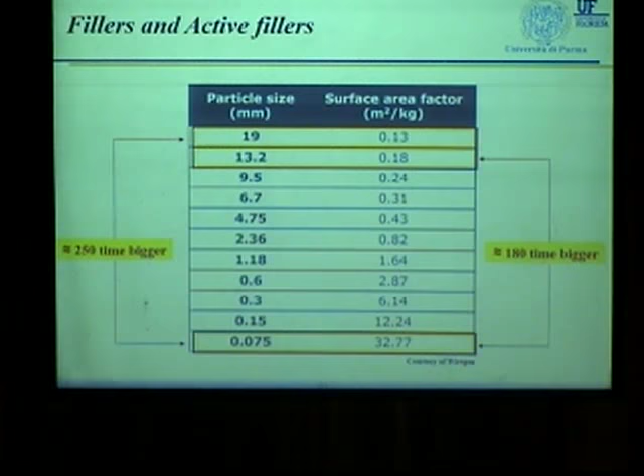We need these because... can you click on the video?

Okay, this is the foam bitumen that is generated in the foaming chamber, and this is what's happened in the mixing part. So we have that the blasting generates a small drop of bitumen that are caught by the filler particles. So you know now why it's important to have a high void element that can catch the bitumen. After that, each particle of filler with the bitumen is inside of the blend and helps the blend and the mixer to be binded.

But we are talking about a non-continuously bounded material. So we have some spots with bitumen that bind the mixer. And we can clearly see here in this microscopic picture that we have part of the aggregate not covered by the bitumen and part where we have the bitumen. And you can clearly see that if you keep it in your hand, you have this spot in the hand.

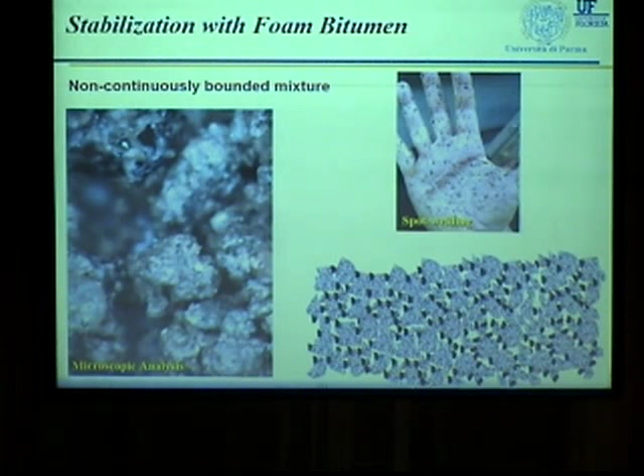You will see that it's a completely different story when we have the emulsion. In this case, we put the material together with the water, and again it's the filler that catches the biggest part of the bitumen and moves it inside of the mixture. So in the first case it's the bitumen droplets and the filler that are the carrier of the bitumen. In this case it's the water that is the carrier of the bitumen inside of the mixture. But again, considering the different surface area of the filler, the biggest part of the bitumen goes to the filler.

So what we have is again a continuously covered material, but we have to remember the amount of bitumen that we have in the mixture. When we have a fully bounded material with 5%, 4% of bitumen, all the aggregates are fully covered in the same way. But if we look at the effective asphalt film thickness, when we have only 2% of bitumen in the whole mixture, we cannot have the same thickness of bitumen on the aggregate that we have in the emulsion. And this thickness doesn't allow this to have a fully bounded material. Even if the aggregates are fully covered, the effective film thickness is so thin that it cannot guarantee a fully bounded material.

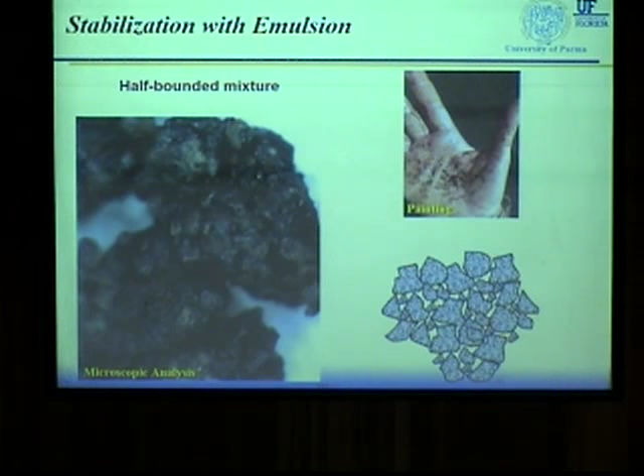So we are in a different way, but more or less in this condition, with a half-bounded material that is generally located below the wearing course or the surface course of the material. So the point is, how can we characterize this kind of material? Because we are not, if you remember the graph, in the field of hot mix asphalt and fully bounded mixture. So we cannot approach this material, as Alan showed in terms of compaction, in the same way that we approach hot mix asphalt.

So we need to identify something that allows us to catch all the properties, and particularly the two phases of the material: the half-bounded phase and the granular part, with the friction and interlocking of the material. So one proposal to characterize that was a simplified triaxial test method. Why the triaxial? Because the triaxial allows us to catch the cohesion, but also the failure envelope and the friction angle. So we may have all the mechanical parameters that can give us the full picture of this material.

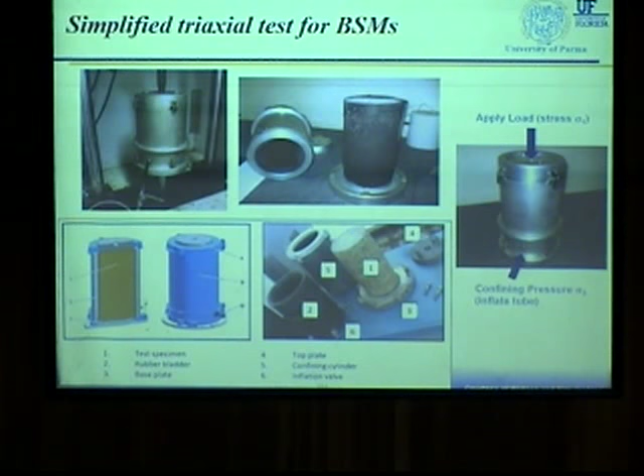And to do that, this is a prototype developed by Wirtgen. It's a simplified mold with an air pressure chamber that can give us the confinement and the vertical load. This method allows us to show how the performance differs from an unbounded material. Generally speaking, if you check the failure envelope of a bitumen stabilized material, you will have something like that, with a higher level of cohesion in comparison with an unbounded material.

These are some preliminary results of a research project going on in my lab. My student did a series of specimens with the same size distribution and same amount of bitumen, but different amounts of active fillers.

Fillers at 0%, 1%, 1.5%, and 2% cement. These specimens were tested after 28 days of curing, just to be sure all the setting reactions of the cement were done.

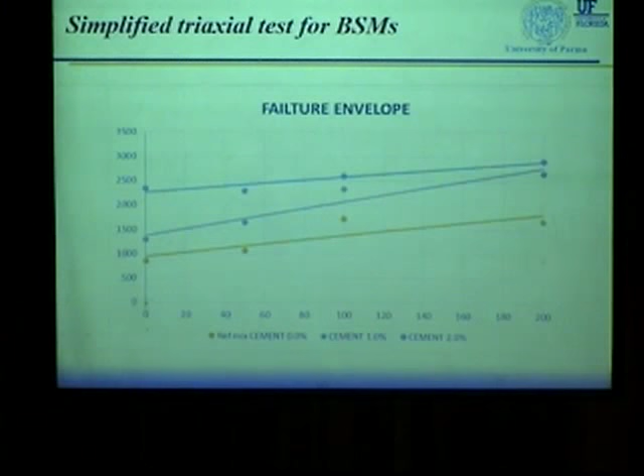If we move to the failure envelope, you can see a strong difference among the three different amounts of filler.

Good morning, ladies and gentlemen. For me it's a great pleasure to be here. You would have seen from the three speakers in this one project that we come from three different continents, so it's like herding cats to have the three of us speaking at the same time.

I'd like to focus a little on the RILEM TC related to RAP, to highlight a few more points about the research and the important aspects of the performance of this material, specifically regarding the influences of RAP.

Picking up from previous speakers, the guidelines now consider requirements for grading and types of aggregates, differing whether they are virgin aggregates or RAP if using cold recycling technology. Another focus is how we manage variability, as we've heard from previous speakers.

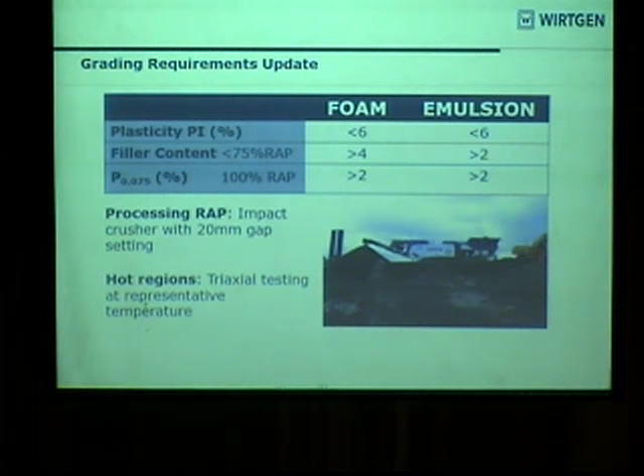It's very important in research to recognize the differences between working with hot and warm technology as opposed to cold technology, in terms of what gradings we should be targeting.

The way we obtain samples for projects using cold recycling technology, whether in situ or in plant, gives us different possibilities. Very seldom, if you're investigating a road and want to apply this technology, can you get a sample from these recycling machines, since you're taking a fairly small sample and it's very expensive to get the machines on site.

Often a milling machine is used instead, and now we have to look at the variables of the material that will influence its grading.

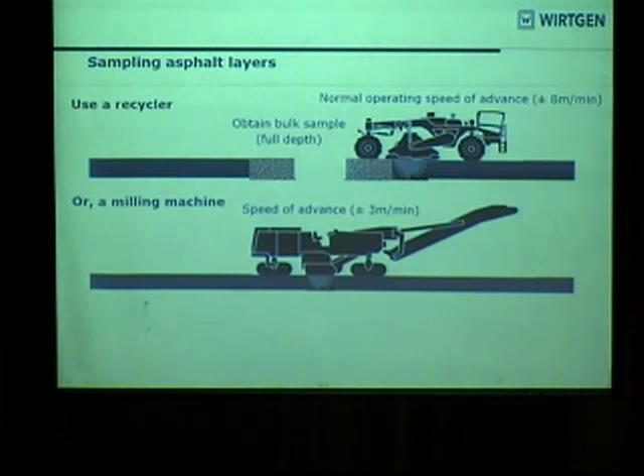If we look at other scenarios for getting samples from the road, it's usually more cost effective to use a small milling machine like this. A small milling machine is often used in a very slow process that grinds the material and breaks it down.

This is very different from the warm and hot process, which is more thermally related — the temperature helps distribute the original RAP mix into its component aggregates.

Not entirely giving you the original grading, but with cold recycling, remember the material is at ambient temperature, which could be 20 degrees, and then you've got lumps of asphalt. What we also don't want is too fine a grading where the milling or sampling machine is actually crushing the aggregate—we just want to separate the aggregates for our research. On the other end of the scale, if you target a smooth, continuous gradation, but the actual project is dealing with heavily crocodile cracked or alligator cracked road, those blocks are very difficult to provide a smooth grading, because then you're going to get a coarser grading and you can result in that type of condition.

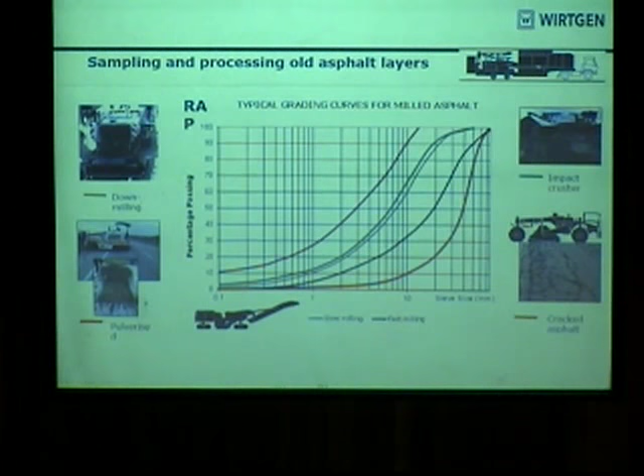This is where the process of cold recycling must be linked to the research and testing that we do. There are solutions: if you're going for in-plant recycling, you can take a coarse grading, process it through an impact crusher, and get your target grading. Alternatively, there are in situ or in-place recycling machines that instead of milling the material upwards, which can give larger aggregate, use a down milling process which pulverizes the material more. These machines are used in North America, both Canada and the United States, and I think there are one or two also in China—not generally available, but when working with 100% RAP, we need to carefully consider how the grading is controlled in the process.

Professor Allen was telling us about the vibrating hammer as one of the components in this round robin. It's a process that came out of our research over many years, and the advantage of using the vibrating hammer is that it simulates both the frequency and amplitude of compaction machines used in the field. It'll be very interesting to see the results coming out of that research with different types of RAP. The research so far has shown good control over variability, and I'll show that in a minute—there's a little bit of repetition with what Professor Gabriella was telling us.

This is a recommended approach to give you an idea of the number of repeat tests needed for reliable results. When you start doing triaxial tests to evaluate one type of bitumen stabilized mix, we recommend at least 10 specimens: 8 specimens with 2 repeats at different confinement pressures for the triaxial, and 2 in the soak condition. We even do an outlier test to first evaluate the compaction in those specimens, to see it's not outside a certain reliability limit.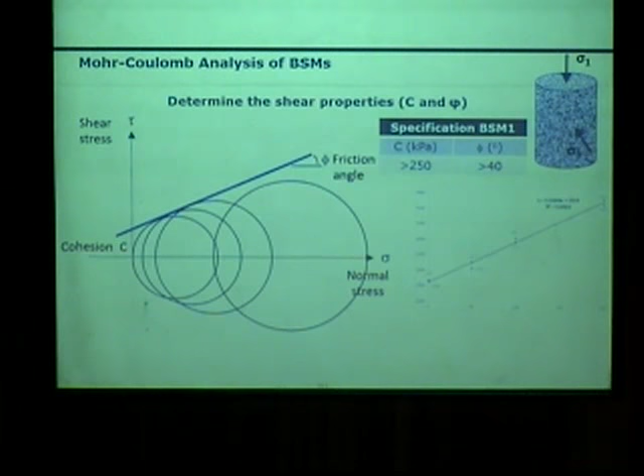You've seen this already, so I'll just highlight something: when doing the triaxial testing, you'll soon see the benefit of having 8 tests, 2 repeats at 4 different confining pressures, in terms of the reliability of that result. The reason is that the shear parameters, the cohesion and the friction angle, are not just a specification test tool—they're also parameters that link directly to performance, and I will explain. Looking at reliability, with vibrating hammer compaction and good quality control, one can get very good correlation coefficients, and one should get that. Otherwise, you've got unreliable results.

Some of the other benefits of using the triaxial to augment ITS type testing with these cold recycling mixes is some of the technology development—for example, we've used CT scans. It's a fairly simple device, this that we see over there. We've looked at scans through the triaxial specimen, which is built in 5 layers of 60 millimeters each, to see there's a good bond, and we look at it volumetrically from the CT scans.

So step by step through the procedures, when we talk about vibrating hammer compaction, it's not just an open procedure—it's got to be a test method where all the variables that can make a difference need to be incorporated. Small things are important.

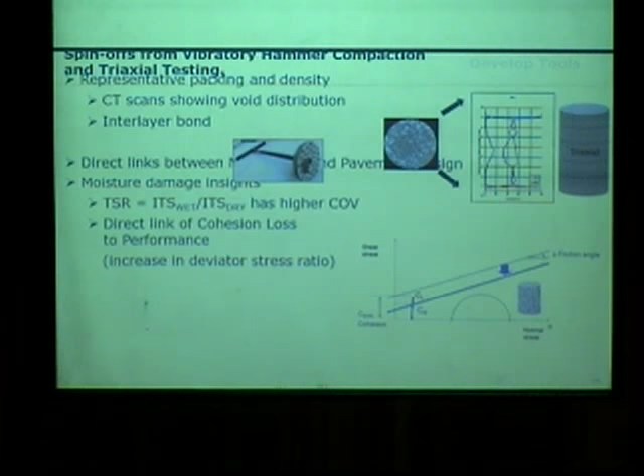The other part of the research has been the wet to dry ratio of ITS testing, and how it translates into triaxial wet to dry ratios. What the research results are telling us is that triaxial testing gives a more reliable insight into moisture damage than ITS testing. But as a starter, looking at different types of mixes, you can handle more variables with ITS because the specimens are much smaller—they take up less material and less preparation time. But one ultimately does need a reliable test that can link to performance.

Where the difference between ITS and triaxial has also shown differences, we heard about recycling and re-recycling mixes. This is an example of what happens if the RAP is providing some unusual results. This came from a project where the RAP being used provided pretty good ITS results but poor shear parameters from triaxial testing. It was only through the triaxial testing that we recognized something strange about this RAP, and we realized it was bitumen rubber asphalt that had been milled out. It was some of that viscous sponginess of the bitumen rubber binder behavior that was influencing the result, and it had to be blended to find the maximum blending content of that specific type of RAP. There are always solutions, but you have to understand the input parameters.

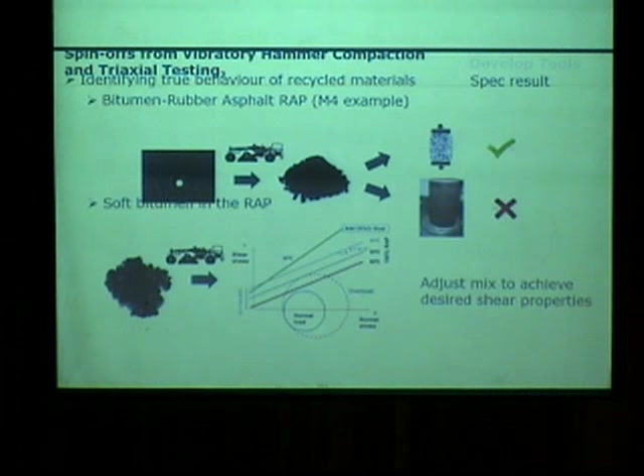One can also look at temperatures when working in high temperature areas, because all of these tests, the ITS and the triaxial, are carried out at 25 degrees. But obviously it's a viscoelastic, thermally sensitive material, which we need to be aware of. So if you're working in really high temperature zones—and I've had the privilege of working in some really high temperature areas where it can influence the deformation behavior—one can simulate that also with a triaxial. You can elevate the test temperature in certain circumstances.

So finally, just to round off with the last slide, or second to last slide, where this fits in—I mentioned earlier that the evaluation with triaxial testing isn't just a specification tool, it's also a link to structural design. How we do this is: for mechanistic empirical type of design, one first looks at the principal stresses in your BSM layer, just analyzing the one layer and its performance. So those principal stresses, based on the wheel loads, the layer thickness, and the resilient modulus, as we know, give us a stress distribution which we can relate to, for example, the Mohr-Coulomb space.

We also know for that material, if we've done triaxial testing, we've got some monotonic strength parameters, the cohesion and the friction angle. Then we can use a deviator stress ratio approach—the ratio of the applied stress to the maximum stress, in other words the shear strength of the material, what it can handle. That deviator stress ratio relates to the rate of rutting, in other words the slope of the permanent deformation curves with repeated loading. This is, as Professor Camillo mentioned earlier, the approach we have now developed and will be testing for different environments. It's already been tested for at least 25 different conditions, but the more information one gathers, the better it can be calibrated. So this is the basis for that mechanistic empirical design function.

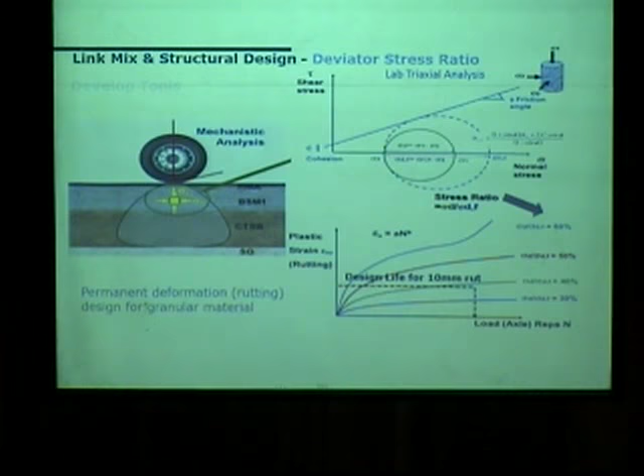So finally, from my side, just summarizing this research project: I think we can learn a lot from the reuse of RAP. As you've seen from the previous speakers, between hot, warm, and cold, it is easier to use high percentages of RAP in cold recycling. But we need to pay attention to different details about the RAP, particularly the processing of the RAP before it's used in cold recycling. So we don't want the type of variability that's created in some environments, like an uneven football playing field. Thank you very much for your attention.

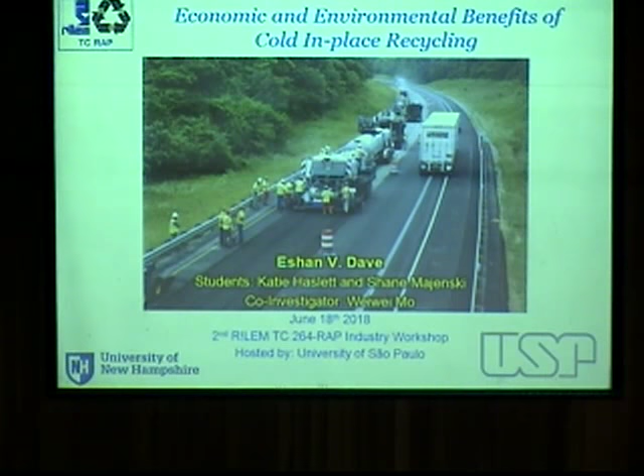This work is really done together with two graduate students, Katie Haslett and Shane Majenski, working together with myself and Weiwei Mo, another professor in our department who focuses more on systems engineering and sustainability evaluation.

The results I'm presenting here come from a project we did recently where we developed cold recycled mix designs for a company for the City of Manchester, which is the largest city in my home state, to do in-place recycling for them.

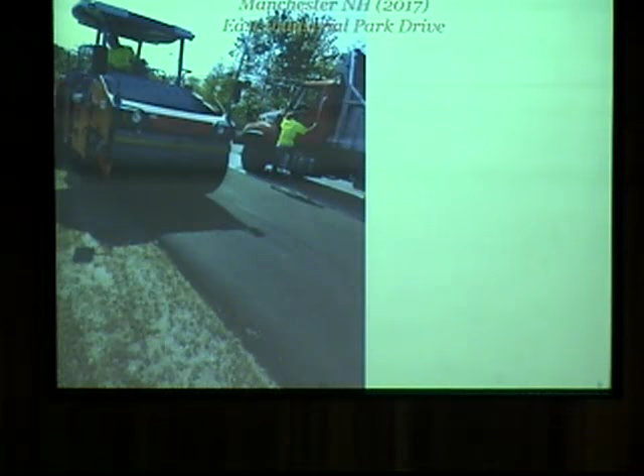As you can see, the final product doesn't look that different than what we are used to with traditional asphalt paving, and that's really the message I was trying to convey with this set of slides.

It was really nice doing this project - we were able to gather a lot of information, and as you saw with Professor Jenkins' presentation, not just find properties for the sake of specification, but find properties we can combine in performance models. These are essential not just for us pavement engineers to look at how long that roadway would last, but also for planners, politicians and economists, so we can determine the cost of one alternative versus another, not just how much it costs today but the life cycle cost. And going a step further, as you saw with Dr. Lopresti's presentation, also looking at environmental impact. This project gave us that opportunity with all the material we were able to sample and all the testing we were able to conduct.

Why cold in-place recycling? I don't think I need to re-emphasize this - it seems in Brazil you're already doing a fair bit of cold recycling. For my region, the New England portion of the US, it's still considered fairly new technology. There's not a lot of in-place recycling; we're doing quite a bit of cold central plant recycling, where you generate RAP, take it back to the plant, do the cold recycling, and bring it back out. The biggest advantage, as you'll also see in my results, is that it can really help lower the cost for two reasons.

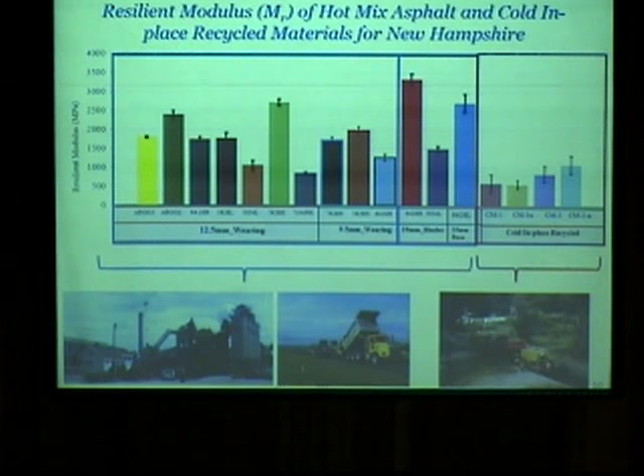So you're not that far. It's no longer the mindset that you are really dealing with a glorified granular material. It's really behaving and performing more like engineered hot mix that we have in our routine practice. The main difference is in order to make these mixes, you need a regular plant, a full paving operation. With these four, you are really doing that construction train approach where you have the recycler and the paving happening all at the same time, as opposed to having this full hot mix plant.

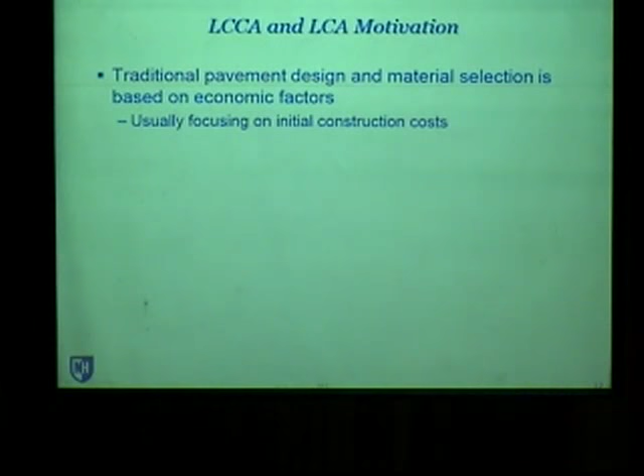Life cycle cost analysis and life cycle assessment, two different terminologies I'd like to introduce here. The reason for them is essentially what I mentioned at the start of my presentation. Our traditional pavement design and material selection processes have been driven predominantly by economics, and mostly by economics of right now. In other words, if I am doing 1 kilometer of roadway this year, what budget do I need? I think gradually as an industry we are realizing that that's not the correct mindset. What we need to look at is what's going to happen in 15 years, 20 years, 40 years, 100 years, and try to make decisions the same way we make decisions when we purchase a car or a house. We don't purchase a house only looking at how much it costs right now, but we look at how much it's going to cost over its lifespan, and when I sell it back at the end, what kind of money I can recover. We need to look at pavement in that same sense. So we really need to incorporate life cycle cost and simultaneously the environmental impact side of things in managing our highway infrastructure.

Life cycle cost analysis can be thought of as a subset of life cycle assessment, focusing on just the economic side of things. It integrates all different costs you may have: initial cost, maintenance cost, rehabilitation cost, and even what you do with the material at the end of its life. Within this, you should also incorporate the user cost, since vehicle users or drivers are the ones using this facility, and that can be built into toll cost or fuel cost and things of that nature.

So it's really a tool that allows us to look at all these aspects of cost, as opposed to only construction or material cost on day one. That's the concept I'd like to show you with results from a case study we recently finished.

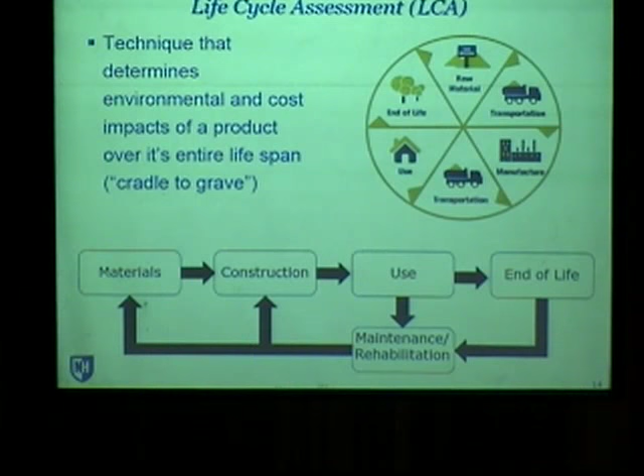The case study I'm showing you here is for a highway located in New England, called I-495. It's one of the loops around Boston, and one of the heaviest traffic roadways in our region. You're looking at about 128,000 average annual daily traffic, with very heavy loads, 2 to 4 million ESALs in one year. We're not looking at lifetime ESALs, just a single year measure, so quite heavy loads.

We used that roadway, a stretch about 22 kilometers long, as a test bed to try out different technologies and approaches in making recommendations for different materials and maintenance strategies. As you can see, we also tried to incorporate traffic conditions. We did not assume everyone is always traveling at 60 kilometers per hour on these highways, because a lot of times there's very heavy traffic and congestion, as you're very familiar with here in São Paulo. So we built that traffic side into our analysis.

That's just the big picture. I'm not going to go into every aspect since we don't have a lot of time, but it really shows the framework that we have developed and have been using. I'd just like to point out two things here.

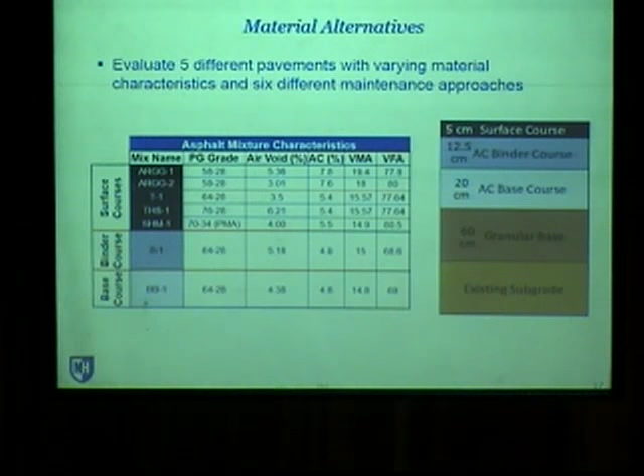These are typical mixes that are used on these highways, so we had properties of them. And that's the cross section. You can see a fairly stout or fairly thick cross section, but that's not a surprise given such a high traffic level. Keep in mind 2 to 4 million ESALs every year, so you're looking at extremely high traffic volume.

In terms of maintenance, we are looking at really 6 different alternatives and different combinations. Something as simple as crack sealing, a couple of pavement preservation techniques like microsurfacing, which is a fairly effective preservation technique. And then from a rehabilitation perspective, we are looking at 2 alternatives: doing cold-in-place recycling, or doing your traditional recycling where you would mill your pavement and replace 50 millimeters of it with a new asphalt structural overlay.

And again, as with life cycle assessment, you have to make sure that all alternatives are compared in a fair way, which means you have to look at long enough time cycles so your results are not biased. For each combination we are looking at, we made sure we had full 3 cycles of its performance simulated.

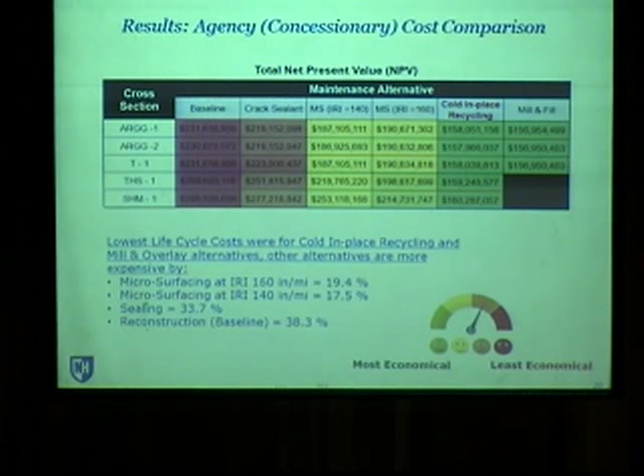You can see that cold-in-place recycling was really shown as a very promising alternative, and especially at much lower cost compared to some of the other baseline scenarios. You are seeing substantial savings just on the part of the agency. This is not including the user costs, which were also fairly low because your pavement roughness is fairly low with the alternative that we were using here.

So just to conclude things: first of all, life cycle assessment is really a good tool to look at things in terms of the overall big picture—not looking at today's investment, but what would happen to this roadway over its lifespan. This isn't surprising to you guys, but when I show this to some agencies in my region, they still think cold-in-place recycling is a technique for low-volume roadways. That's the general mindset, but our research shows that's not true. You can do good engineered cold-in-place recycling systems that work on very high-volume roadways, and we are trying to change that mindset and have them be more bold in using these technologies.

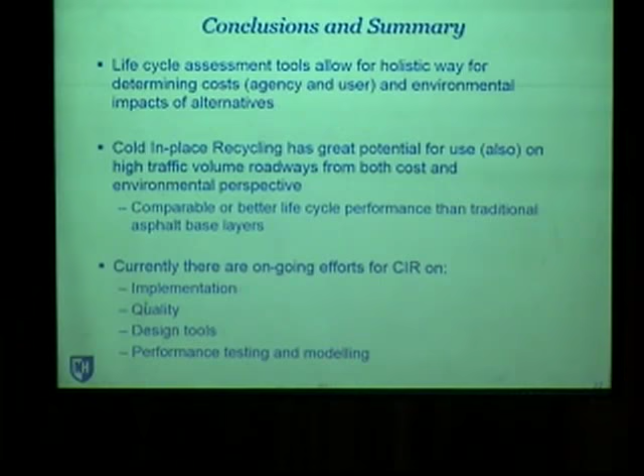The only other thing I have is we are putting together a webinar through RILEM committee on life cycle assessment. This one is focused on pavement LCA with emphasis on recycling. It's a free webinar. I've asked Camila to send out information about it to all participants today, so you will get an email from Camila about this. We really hope that you can join this webinar and get a little bit more background on the LCA side. I don't think I had enough time to do justice on what all these approaches can do, but I hope this will allow you to get more background. So that's all I have, and hopefully we are not too late.